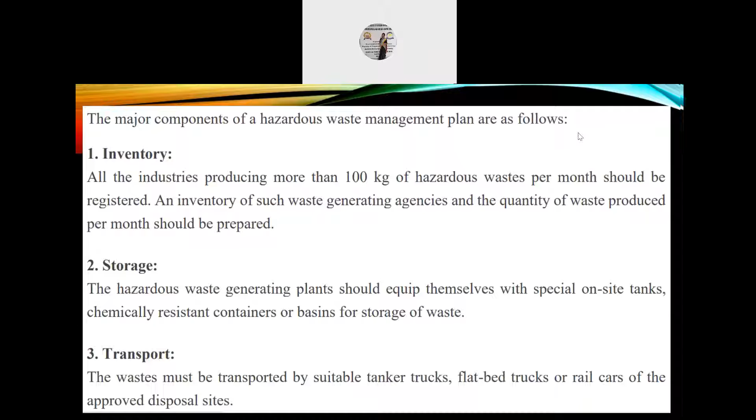Number four, spillage. A well-publicized emergency plan should be prepared to deal with unexpected spillage or accidental release of contaminants during transportation to prevent environmental damage and public health hazard. Number five, disposal. The waste should be transported to a physical and chemical treatment plant for processing or concentration or hauled directly to an approved hazardous waste treatment facility for final disposal.

Number six, waste exchange. When on-site recycling or recovery of waste is not feasible, that is not approachable, the possibility of waste exchange should be explored. So, transferring waste from large industries to smaller ones, which are able to reuse low purity oils, acids, alkali, solvents, or recover valuable metals and other materials from concentrated waste, can also be considered.

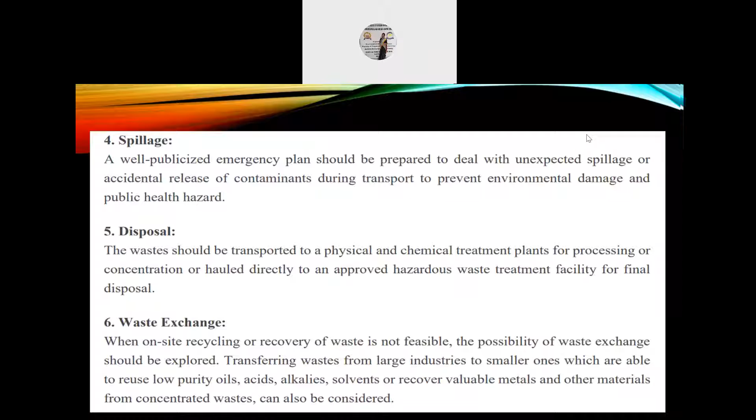The next topic is flood control of dams. So, flow-through dams, also known as perforated dams, are constructed solely for the purpose of flood control and mitigation of flood risk in downstream communities and ecosystems. So, unlike reservoir dams, which are built primarily for water storage or power generation, the spillway, which is the opening, is built at the same height as the riverbed level, allowing the river to continue its natural flow in normal conditions. When the water level rises above the spillway, the dam restricts the amount flowing through the opening, decreasing peak flood flow.

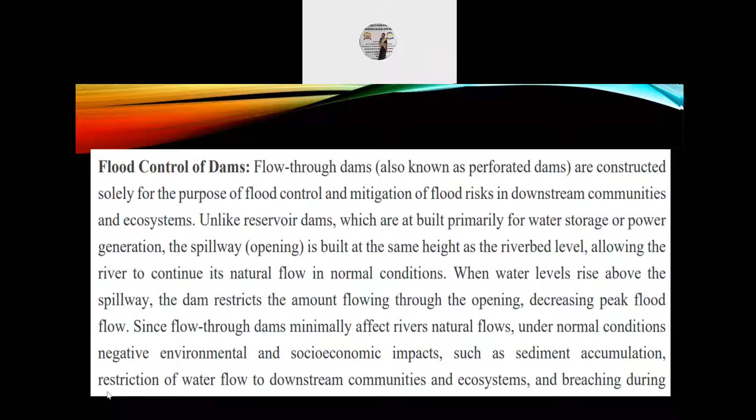Since flow-through dams minimally affect rivers and natural flows under normal conditions, negative environmental and socio-economic impacts such as sediment accumulation, restriction of water flow to downstream communities and ecosystems, and breaching during very extreme flood events can be minimized or avoided altogether. So flow-through dams are constructed in high flood risk areas, particularly those with important infrastructure and livelihoods.

So planners, local decision makers, and construction engineers are the typical stakeholders involved in construction site choice as well as spillway and wall height selection and setting of desired river flow rates and dam carrying capacity. So post-dam construction, socio-economic and environmental impact assessment criteria should be established as part of implementation to avoid negative impacts on ecosystems and local communities. Operational management typically includes general maintenance and occasional clearing of sediments or other accumulations preventing optimal water flow.

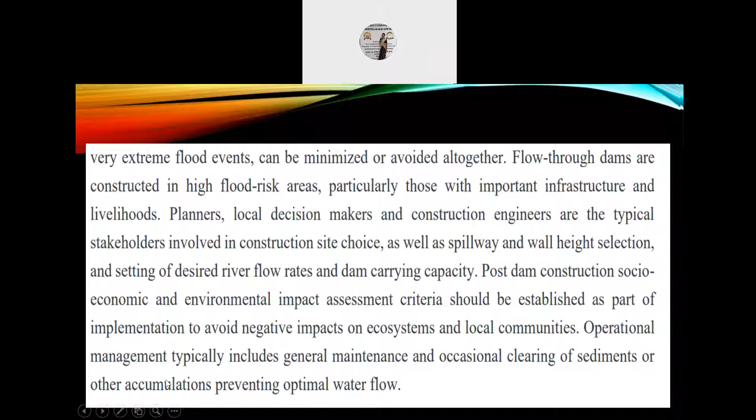So the next topic is multi-purpose water projects. The multi-purpose projects are explained here below. The first one is the Damodar Valley project.

The aggressive Damodar during the rainy season, with all its surplus water, used to engulf the entire region. Periodic and successive floods were so disastrous that Damodar was aptly known as the Curse of Bengal. But after the construction of several dams, recurrence of flood is nowadays a bygone chapter.

Storage dams were constructed at Tilaiya, Maithan, Panchet and Konar. The combined area controlled by all these dams is about 13,500 square kilometers. Hydropower generation plants were erected at Panchet, Tilaiya and Maithon. Three thermal stations were also created at Chandrapura, Durgapur and Bokaro to provide power to the core sectors of industry and commerce, for example railways, steel plants, coal mines. The major objective of this pioneer

Maybe you should increase your volume, because at my end the volume is full. And those who are giving your attendance now, I won't accept it since the class is still going on and I am not asking for your attendance now. So it would be better if you concentrate on the lecture.

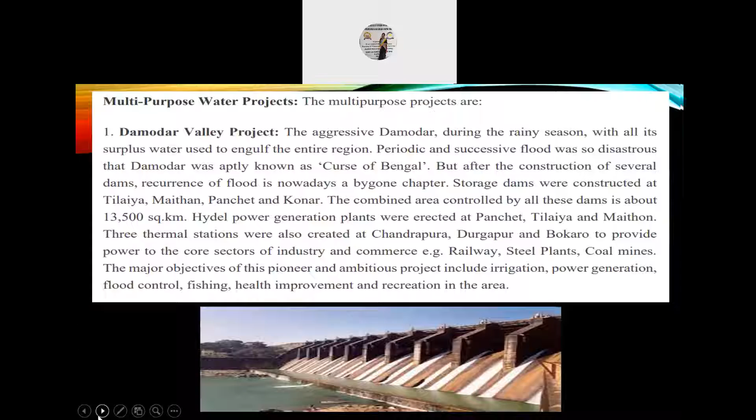Okay, so number two, Bhakra Nangal project. It is the most ambitious project to convert large barren semi-arid tracts of northwest India into lush green fertile agricultural fields. Bhakra Nangal project was one of the largest multipurpose Indian projects constructed over the river Sutlej. From the constructional point of view, erection of this dam was a remarkable achievement. The entire work was undertaken jointly by the states of Punjab, Haryana, Rajasthan and the central government. After construction, Bhakra became one of the highest dams in the world.

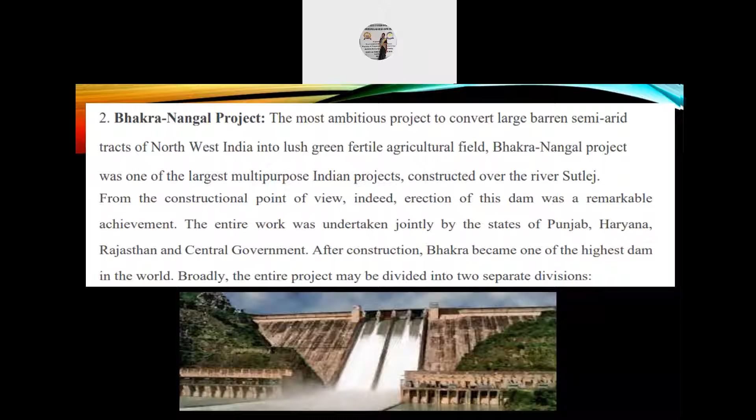Broadly, the entire project is divided into two separate divisions. Check your network, Sanjay. The Bhakra Dam: this project has the capacity to store more than 10,000 million cubic meters of water. This lake is known as Govind Sagar. Number 2, the Nangal Dam, constructed 13 km downstream of Bhakra. Any irregularities caused by Bhakra Dam are rectified here, and the stability of the channel is maintained. The combined length of the Bhakra Nangal Canal exceeds 1000 kilometers.

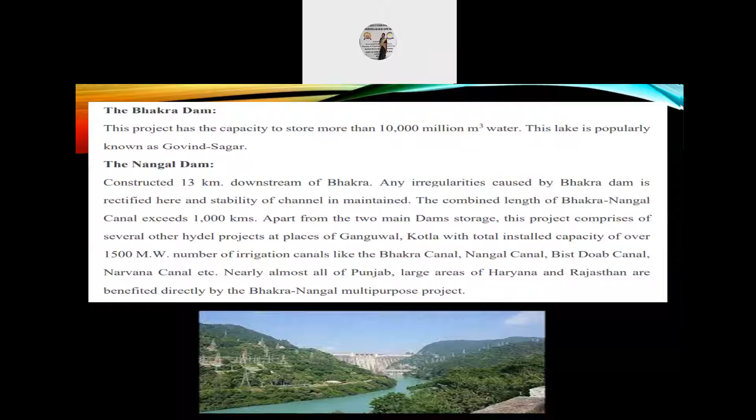Apart from the two main dam storages, this project comprises several other hydel projects at places like Ganguwal and Kotla with a total installed capacity of over 1500 megawatts, and a number of irrigation canals like the Bhakra Canal, Nangal Canal, Bist Doab Canal, Narwana Canal, etc. Nearly all of Punjab and large areas of Haryana and Rajasthan are benefited directly by the Bhakra Nangal multipurpose project.

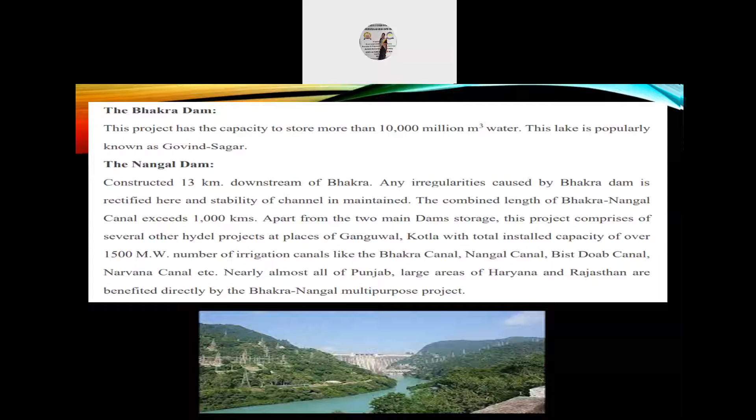Next, the Hirakud project. Mahanadi is the lifeline of Orissa; it enters Orissa from the highland of Naraj. This rapid fall from considerable height provoked planners to erect this monumental dam at Hirakud. This is the longest dam in India. The major benefits behind the construction of this dam were to harness ample hydel power from the swift flow of water, to control occasional floods and resultant havoc, irrigation canals to large areas of Puri and Cuttack districts,

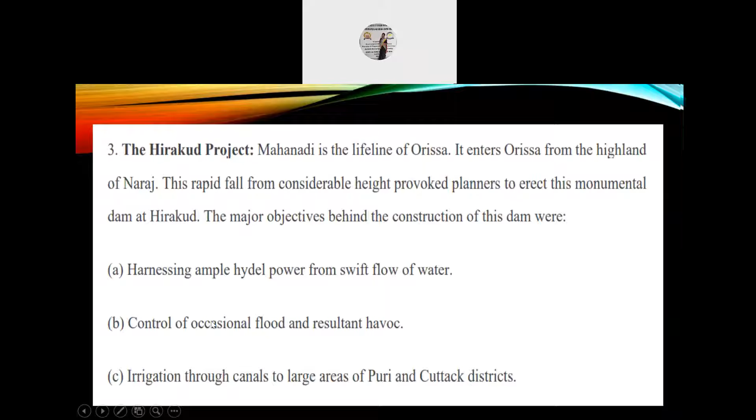then improvement of water transport through greater navigability, overall economic development of the area by providing employment at the project, rapid industrialization of the area through stable and assured power supply, and the increase of other minor economic activities like fishing and tourism.

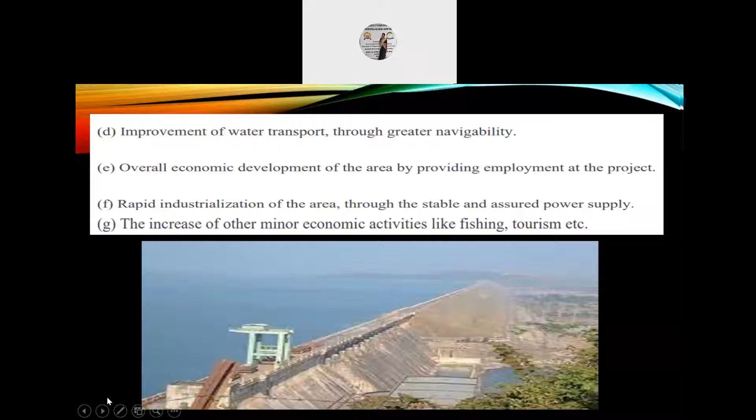Number 4, the Nagarjuna Sagar project. This is the biggest river project in Andhra Pradesh. A dam was constructed near Nandikonda village. This project was made to ensure irrigation water in Khammam, Guntur and Kurnool districts.

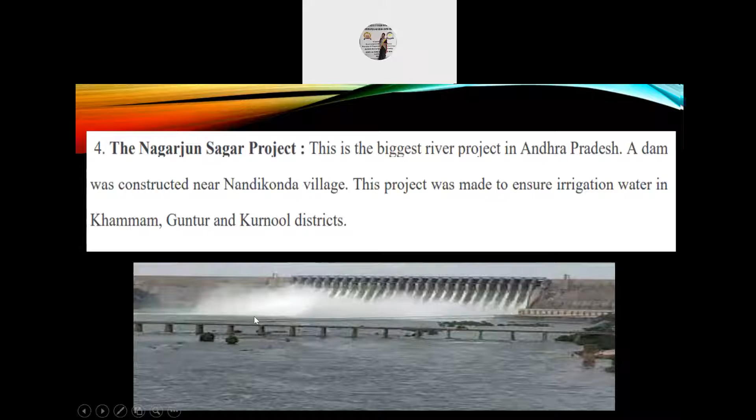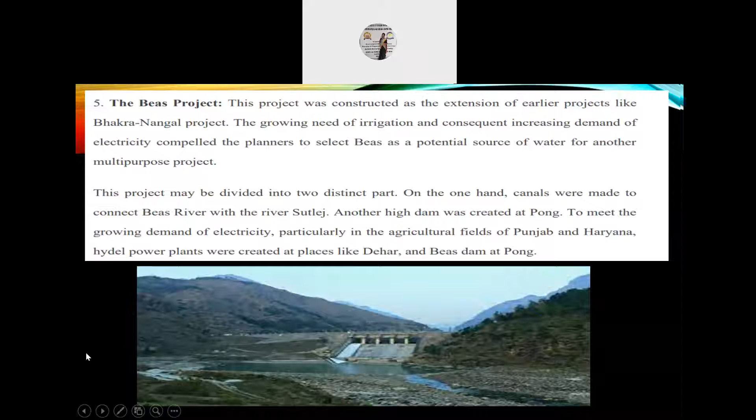The last one, number 5, the Beas project. This project was constructed as the extension of the Bhakra Nangal project. The growing need of irrigation and consequent increasing demand of electricity compelled the planners to select Beas as the potential source of water for another multipurpose project. This project may be divided into two distinct parts. On one hand, canals were made to connect the Beas River with the river Sutlej. Another high dam was created at Pong, in the Himalaya. To meet the growing demand of electricity, particularly in the agricultural fields of Punjab and Haryana, hydel power plants were created at places like Dehar and the Beas Dam at Pong.

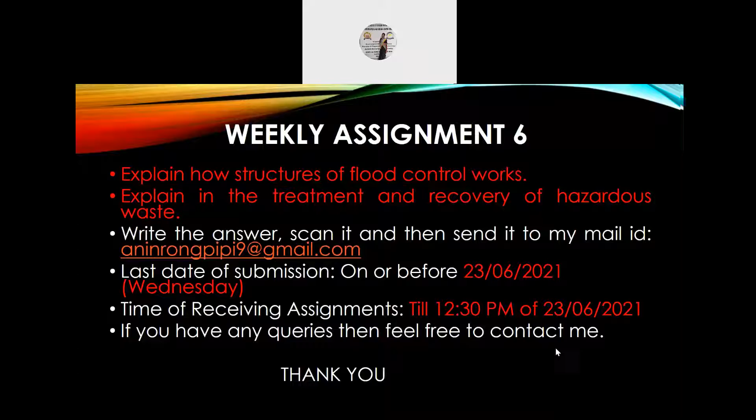So this is weekly assignment number 6. You have to explain how structures of flood control work, and second, you have to explain the treatment and recovery of hazardous waste materials. The last date of submission is given here, and the last time of receiving the assignments is also given. It is till 12:30 p.m. of 23rd June.

So you can give your attendance now in the chat box. The attendance that will be given now will only be considered. Those students who were giving attendance when the class was going on, I won't be accepting their attendance. I hope that's clear. Every class I used to tell it, but no one listens to it. So this time I am being more serious about it, so I won't be giving attendance to those students. Thank you.

Every year, floods make their way through populated areas, costing lives and millions of dollars in damages, devastating communities, and grinding local economies to a halt. If you've ever experienced one yourself, you know how powerless it feels to be up against Mother Nature. And if you haven't, be careful in thinking it can't happen to you.

Nearly every major city across the world is susceptible to extreme rainfall and has areas that are vulnerable to flood risk. Luckily, we've developed strategies and structures over the years to reduce our vulnerability and mitigate our risk. We still can't change how much it rains, at least in the short term, but we found lots of ways to manage that water once it reaches the earth to limit the danger it poses to lives and property.

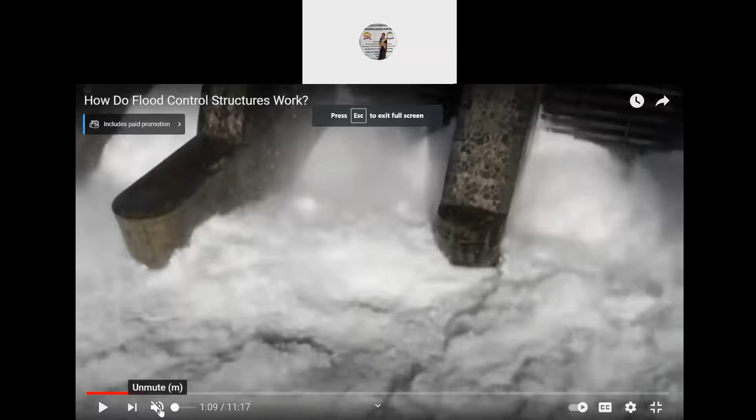We all know generally what a flood is. Too much water in one place at one time. But I think there's still uncertainty in how floods actually occur. Part of the reason for that confusion, I think, is the huge variety of scales we have when talking about flooding. Most river systems are dendritic. The topography of the land and long-term geologic processes mean that streams join and concentrate the further you move downstream, just like the branches of a tree.

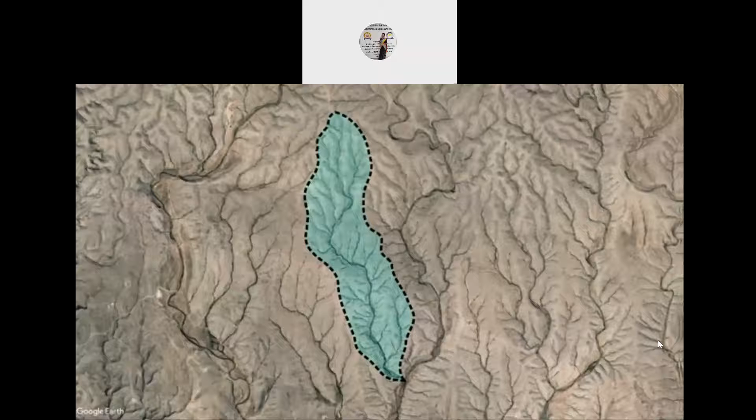A watershed is the entire area of land where precipitation collects and drains into a common outlet. It's a funnel. And as you move downstream, those funnels start to combine. The further you go, the larger the watershed becomes as more and more streams contribute to drainage. So watersheds can be tiny or gigantic. Your front yard is a watershed to the gutter on the street. If it happens to be raining hard directly on your house, the gutter will flood, maybe even overtop the road onto the sidewalk.

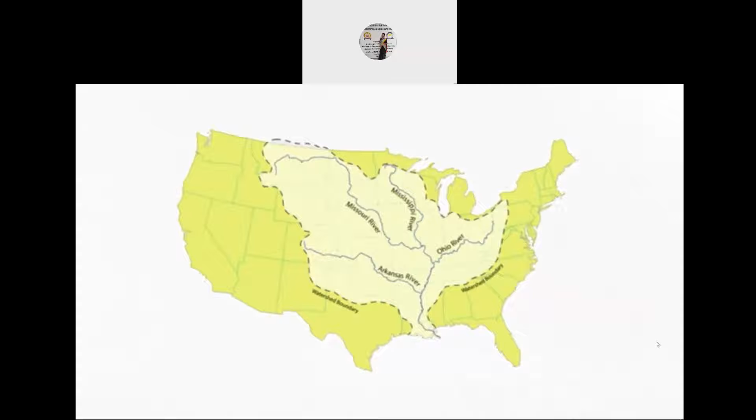At the complete opposite end of the spectrum, more than 1 million square miles, or 3 million square kilometers, make up the drainage area of the Mississippi River in the US. A big rainstorm in one city is not going to make a dent in the total flow of this river. But if everywhere in the basin is having an unseasonably wet year, that can add up into major flooding as all that water concentrates into a single waterway. This seems simple, but it's a real conceptual challenge in understanding flooding, not to mention trying to control it.

Smaller watersheds only flood during single intense storm events called flash floods. Usually this water is already long gone by the time the next storm comes. In contrast, large watersheds flood in response to widespread and sustained wet weather. They aren't really affected by single storm events. Of course, in a dendritic system, there's everything in between, which means a flood can be a local event affecting a few houses and streets for a couple of hours during an intense thunderstorm, or a months-long ordeal impacting huge swaths of land and multiple communities.

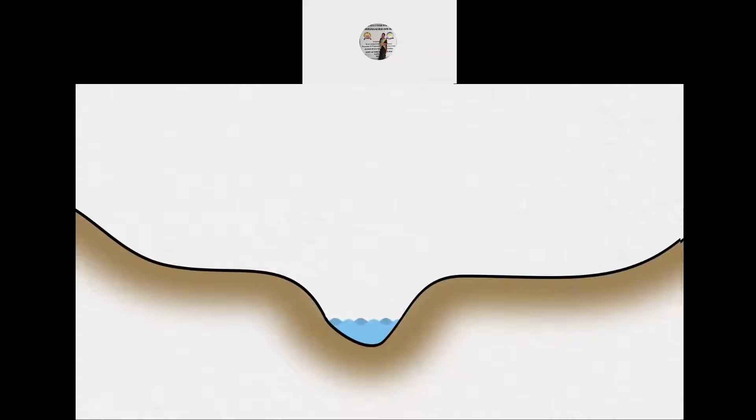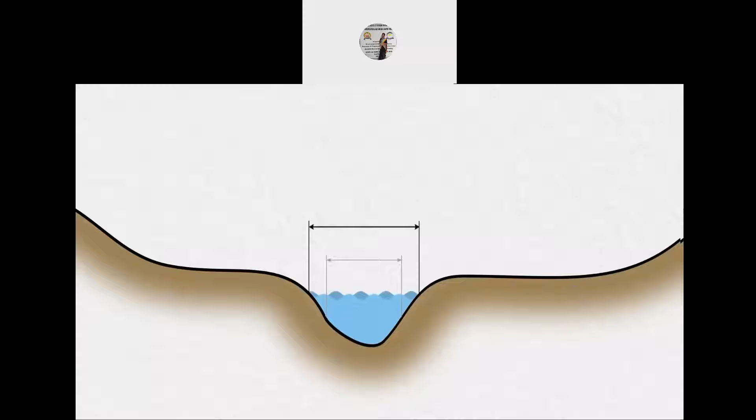Riverine flooding is also a challenge because it's not linear. This is a generalized cross-section through a river. You have the main channel where most normal flows occur. Every unit of rise in the river doesn't equal that much extra width in inundation. Plus, there's not much development within the banks of a river, maybe some low bridges and a few docks. But above the channel banks, things change. The slopes aren't so steep, and you end up with wide, flat areas of land. And you know what we humans like to do with wide, flat areas near waterways?

We build stuff, like entire cities, there or use it as farmland. The problem is that once a channel overbanks, every unit of rise in the river equals much wider extents of inundation. You can see now why this is called the floodplain.

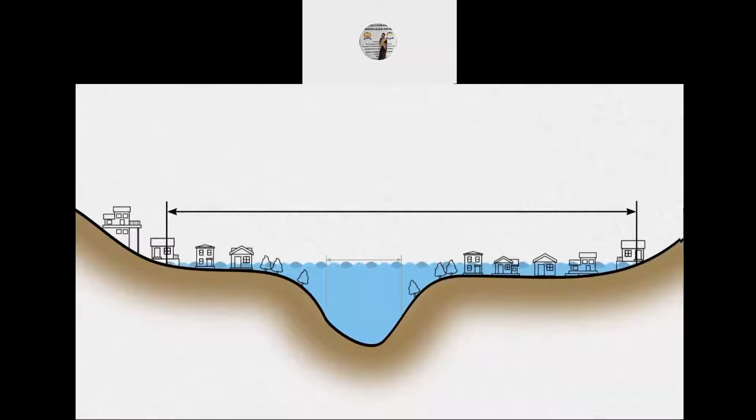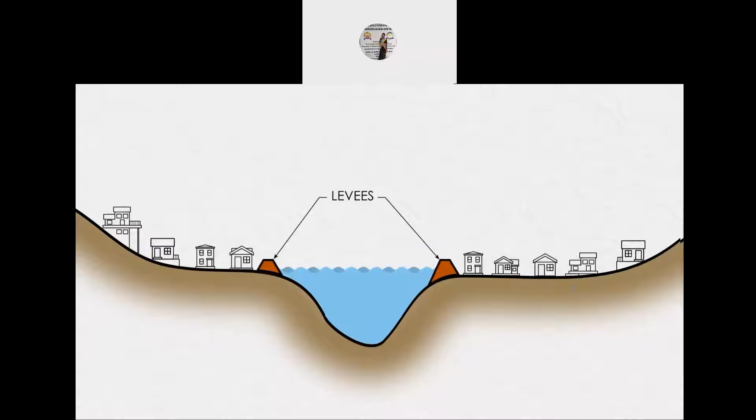And looking at a cross-sectional view, it's easy to see one of the most common structural solutions to flooding. Levees. If overtopping the banks of the river creates the problem, we can just make the banks of the river higher by building earthen embankments or concrete walls. Levees protect flood-prone areas by confining rivers within artificial banks. That means areas outside the levees flood less frequently.

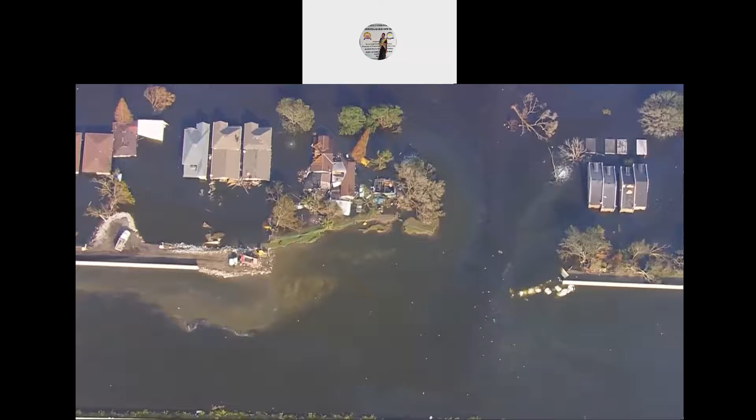It doesn't mean they have zero flood risk at all, since it's always possible to have an extreme event that overwhelms the levees. For earthen structures, overtopping of a levee can cause erosion and even failure or breach of the berm. That can make flooding even worse than it would have been otherwise, especially if people weren't evacuated from the area ahead of time. So even though they're a pretty simple solution to the problem of flooding, levees aren't perfect.

Sometimes getting that water out of the channel is exactly what you want, though. Another tried and true flood control technique is diversion canals. These are human-made channels used to divert floodwaters to undeveloped areas where it won't be as damaging. Often it's not possible to widen an existing river because there's already too much development or for environmental reasons. So instead we create a separate channel to divert floodwater around developed areas and back into the natural waterway downstream.

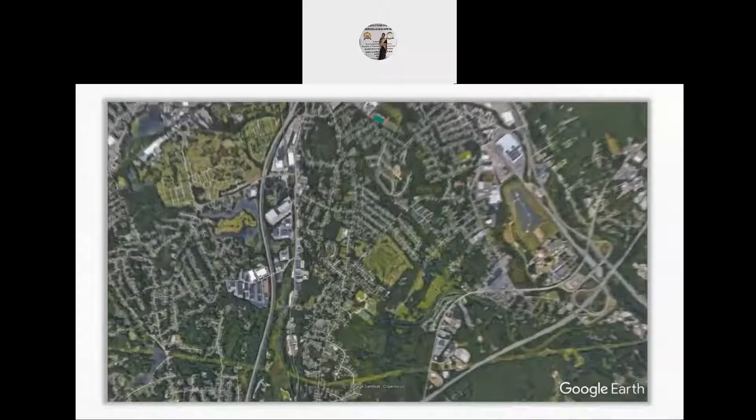In most cases, there will be some kind of structure at the head of the diversion channel to help control which route the water takes. For normal conditions, water will flow through the natural river. But when a flood comes, most of that water will be diverted, reducing the flood risk to developed areas.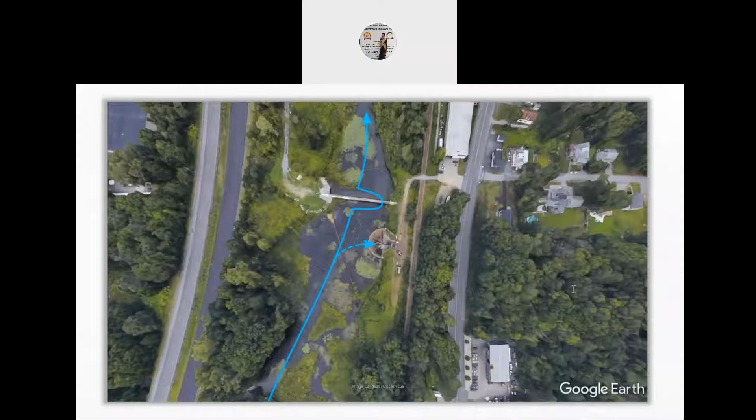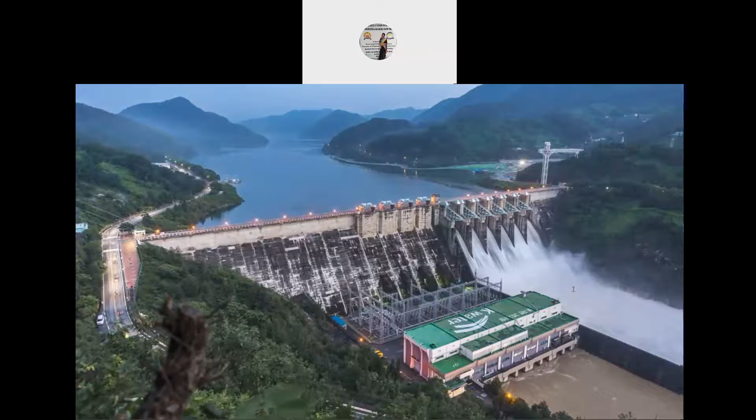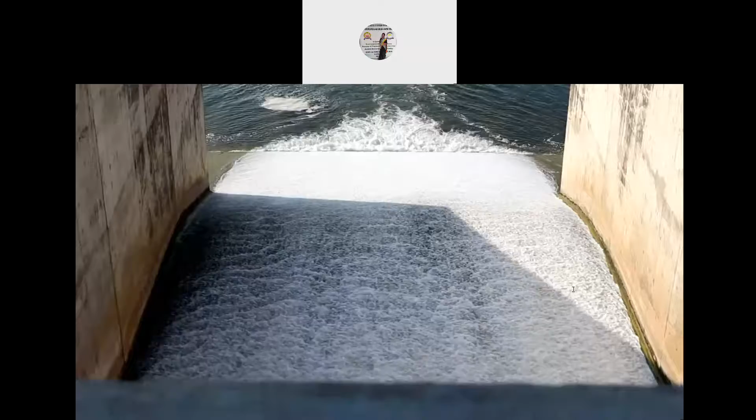But it would be nice if all that water didn't make it into the river in the first place. That's only possible with the other major type of flood control infrastructure, dams. These are structures meant to impound or store large volumes of water, creating reservoirs. Dams meant for flood control are kept partially or completely empty so that when a major flood event occurs, all that water can be stored and released slowly over time.

The theory here isn't too complicated. We can't change the volume of water that comes from a flood, but with enough storage, we can change the time period over which it gets released into the river. Big sloshes of water into this bucket come out slowly over time. As long as the sloshes are far enough apart and the bucket is big enough, you almost never see significant flooding out on the other side.

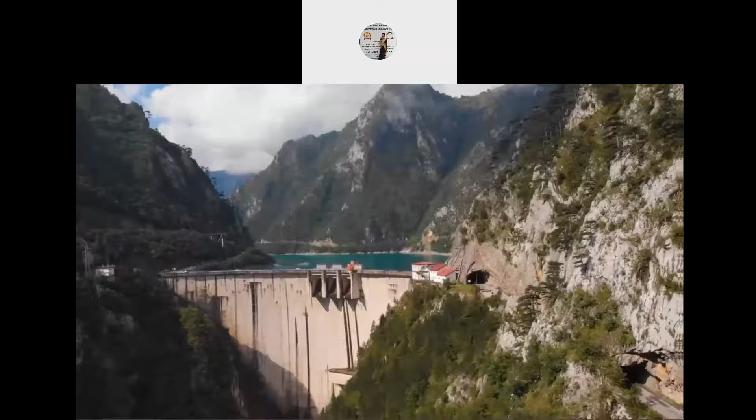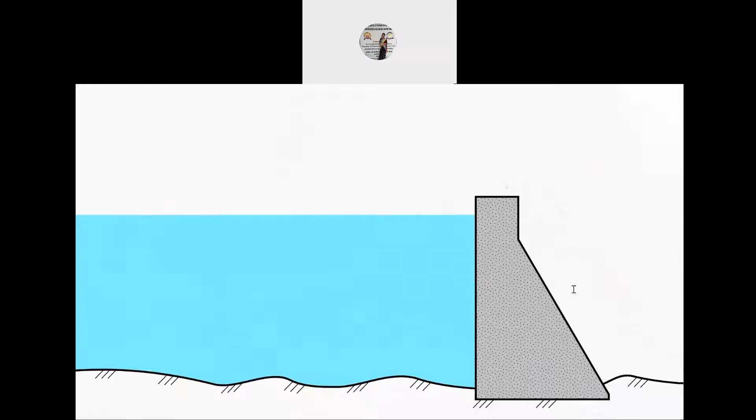But not all dams are built specifically for flood control. Many reservoirs are intended to stay as full as possible so the water can be used for hydropower, supplying cities, or irrigation of crops. If a water supply reservoir happens to be empty at the time of a big flood, it will work just like a flood control reservoir, storing the water for later use. But if the reservoir is already full, they have to open the floodgates to let the water through. This can be frustrating for the residents downstream who may have thought they had protection from the dam.

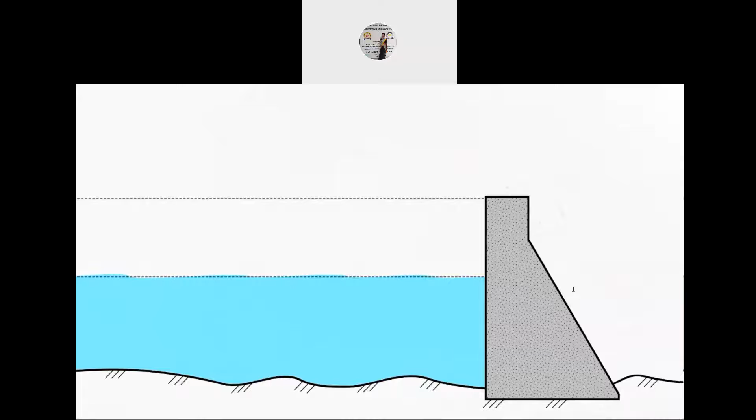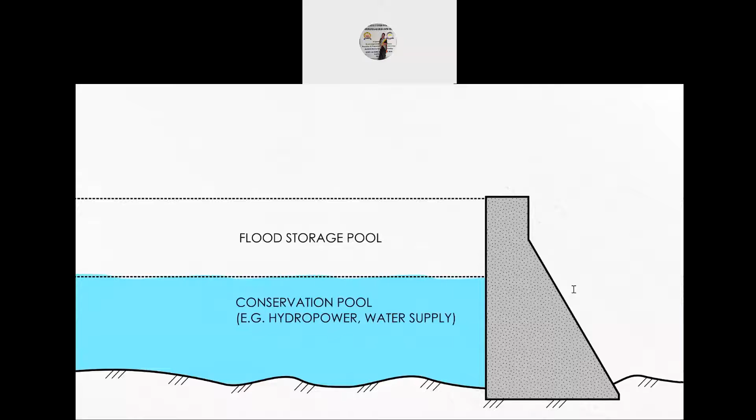In many cases, a dam can serve multiple purposes at the same time. Different zones called pools are established for different uses. One pool is kept full to be used for hydropower or water supply, and one is kept empty to be used for storage in the event of a flood. Finding the right balance point between how much storage to keep full versus empty is a complicated challenge that considers climate, weather, and the maximum amount of flow that can be released without damaging property downstream.

Some dams vary the size of these pools over the course of the year, depending on the seasonality of flooding. And some even use risk indicators, like the depth of the snowpack within the watershed, to dynamically adjust the volume available to store a potential flood.

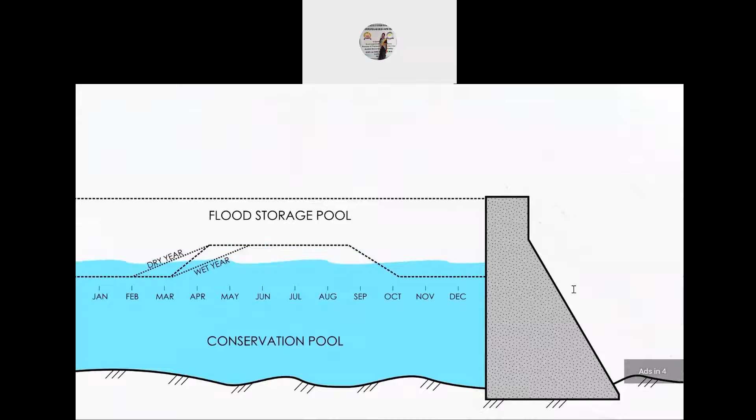I've been using the term flood control throughout this video, but the truth is that term is falling out of favor. Now, if you ask an engineer or a hydrologist, they're more likely to talk about flood risk management. Our ability to quote unquote control Mother Nature is tenuous at best, and the more we try, the more we realize this. Even if expensive infrastructure is helpful in a lot of circumstances, at best it is an incomplete strategy to reduce the impacts of flooding over the long term.

For one, flood control structures, especially levees, can protect some areas while exacerbating flooding in other places. For two, overbanking flows are actually beneficial in a lot of ways. Just like wildfires, flooding is a natural phenomenon that has positive effects on the floodplain, like improving habitat, ecology, soils, and groundwater recharge. And for three, we're understanding more and more the true value of resiliency. That is, instead of reducing the probability of flooding, instead reducing the consequences.

This is normally accomplished with strategic development, like reserving or converting the floodplain for natural wetlands, parks, trails, and other purposes that aren't as easily damaged by flooding. In fact, flood buyouts, where high-risk property is purchased and converted to green space, is often the most cost-effective way to reduce flood damages in the long term, even if not the most politically popular strategy.